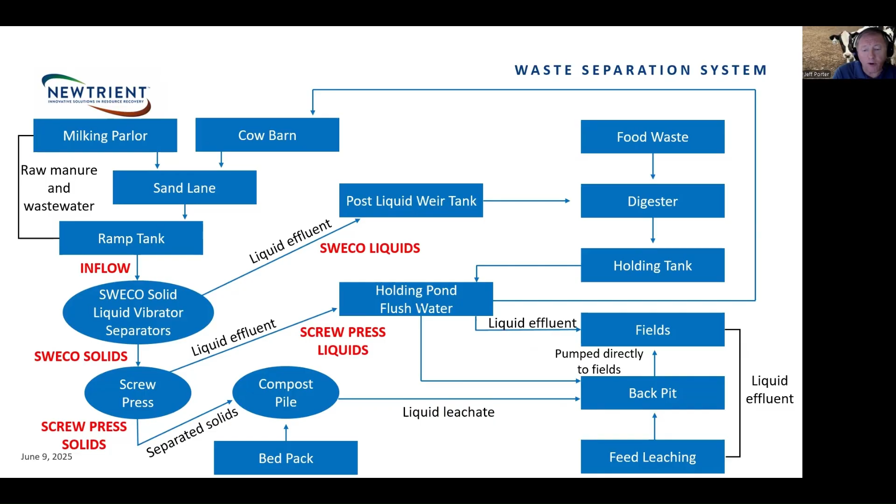Liquids from the screw press and digested effluent from the digester flow into the holding pond where it can be land applied and used for flushing the sand lanes. This operation looks to optimize their waste management system and utilize as much of the material as possible for on-farm use and for developed markets. Now, even though the Sweco vibratory screen is a small part of the overall manure management system, its role cannot be understated.

For the on-farm dairy industry, the Sweco vibratory screen is used primarily to separate solids from liquids. The three-dimensional vibratory action enhances this separation process. This vibratory action also helps to keep the screen clean, reducing downtime. It can be used for various applications, ranging from coarse solid separation to fine solid separation. And how it is used is dependent on the dairy's goals and objectives. Units can be operated individually or in series where they might be stacked or used in parallel. There are a number of different screen sizes, which adds to the flexibility of this technology. It is also used in separating dry products.

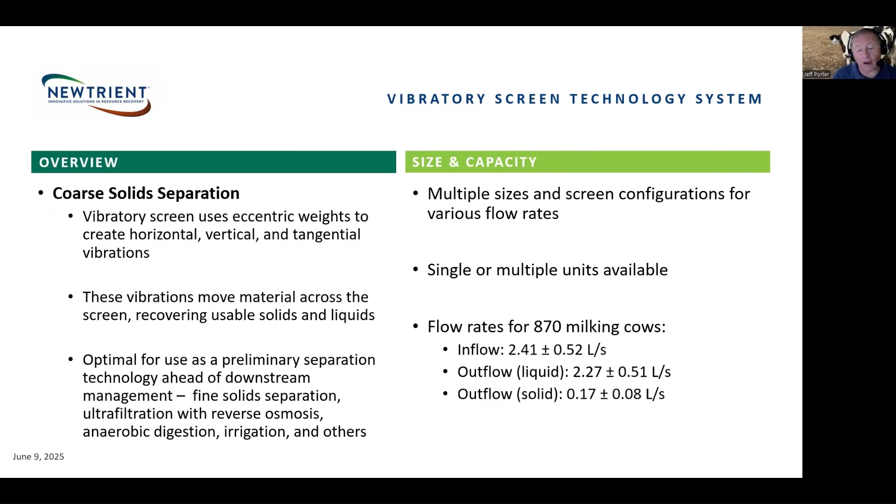Now, I have heard about vibratory screens for a number of years, but the only thing I ever saw was a schematic of one in publications. And that very same image was apparently used in all of the references that I had reviewed. But over the last few years, I have seen these vibratory screens installed on several dairies.

Here we see a cutout of a Sweco vibratory screen separator. And as the unit vibrates, the larger material moves to the oversized discharge, while the liquids and smaller solids flow through the screen and out of the undersized discharge. Separator efficiency and throughput can be adjusted with the ProGlide linear weight system. Also, up to 4 drums can be placed on a unit for providing additional separation fractions.

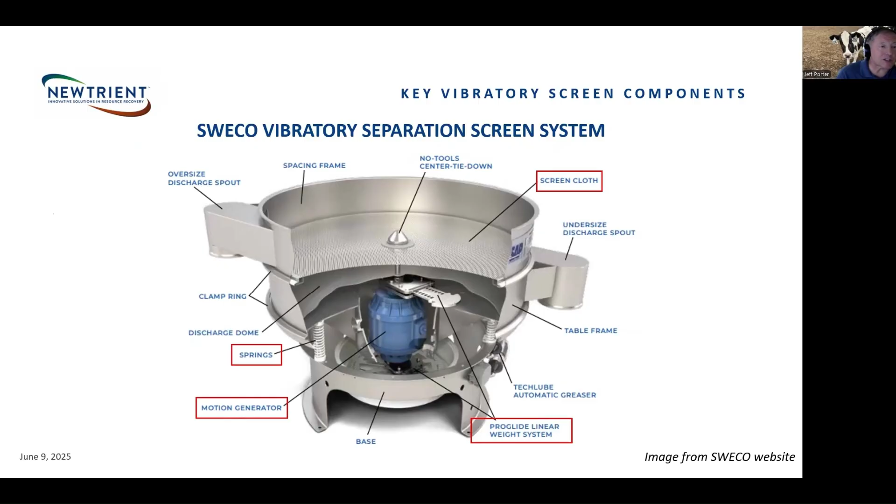Now, when looking for a waste separation system, as mentioned earlier, the technology or technologies selected are to meet the objectives of the dairy. Does one have the right feedstock for the system to operate properly? Will it flow through the system properly? Are the correct screen sizes used? What are the different products going to be used for, the larger coarse solids and the liquid effluent?

The Sweco units should be under roof and protected from weather. Manure slurry should not be frozen as it will not separate properly and will likely damage the screen and the separator. Proper and adequate storage should be provided for each of the products that are produced. Even though not as critical for the Sweco system, most sand should be removed from the waste stream in that it can potentially increase wear and tear on gears, screens, and shafts. With the tangential action of the screen, it is essential that all operation and maintenance requirements are followed to keep the unit running efficiently.

Now, as mentioned before, there are a number of applications for the Sweco separator. For the dairy where this evaluation was performed, the coarse solids were removed and the resulting effluent went to the anaerobic digester. Since these larger solids take longer for the microbes to break down, they were removed to help improve digester performance. It also allowed them the ability to create a compost product with the larger solids. Additionally, since the anaerobic digester had no direct agitation system, these larger solids would have a tendency to settle, reducing digester capacity and requiring periodic cleanouts.

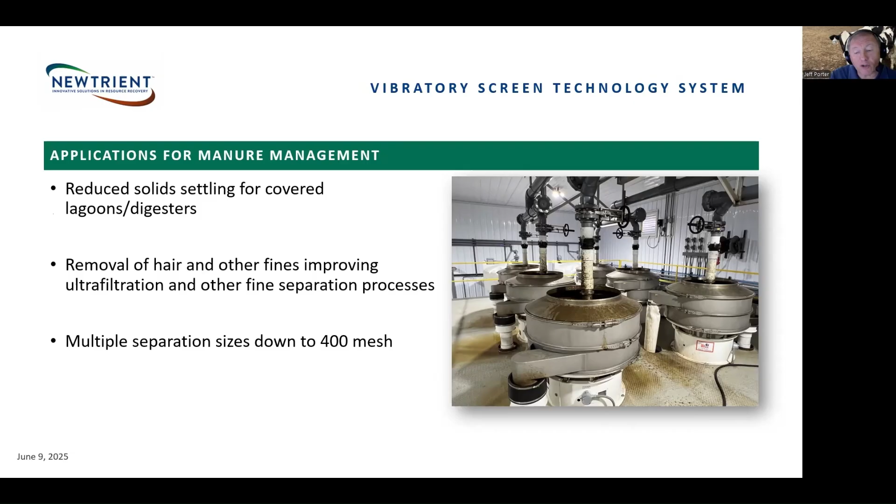For another dairy, the Sweco separator was used in this particular case to remove material like animal hairs and other fines that pass through the coarse solid separation system. This helped to improve the performance of ultrafiltration that was used on this farm and to reduce the amount of downtime required for backflushing the filters. The large number and various screen sizes also adds to the versatility of this technology. Now that you have a little background of this technology, let's take a look at some of the results from the evaluation of the Sweco vibratory screen.

For this evaluation, 5 manure samples were collected 3 times a week over a 16-week period. Even though this review focused on the Sweco separator, samples were also taken from the screw press. Flow rates were estimated using a bucket test. All of the samples were sent to the A&L Great Lakes Laboratory for testing. Results were reviewed and analyzed by the University of Delaware.

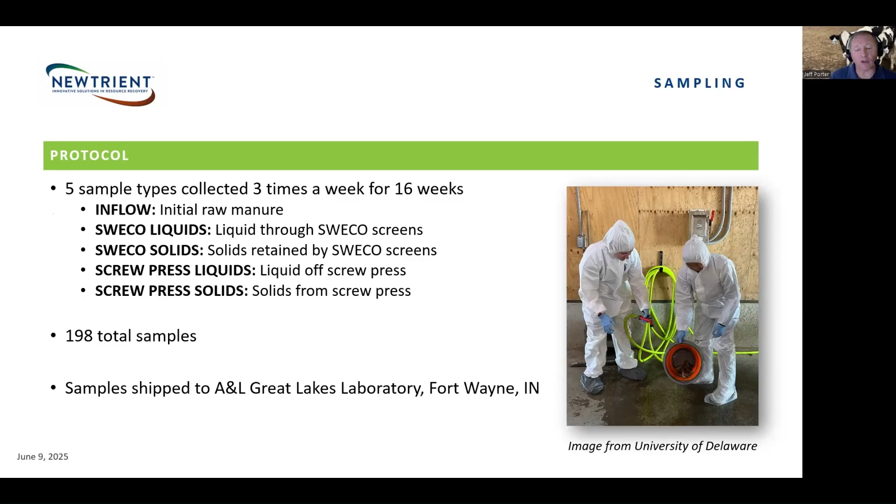As mentioned earlier, the Sweco screen was used to separate coarse solids from the waste stream. Liquid effluent from the Sweco flowed to the anaerobic digester for energy generation. The coarse solids portion went to a screw press. The solids portion was still relatively high in moisture content, around 90% or so, but had a lower moisture content than the original waste stream. The higher solids content helped the screw press operate more efficiently. The material shown in this image comes from the solids component of the screw press.

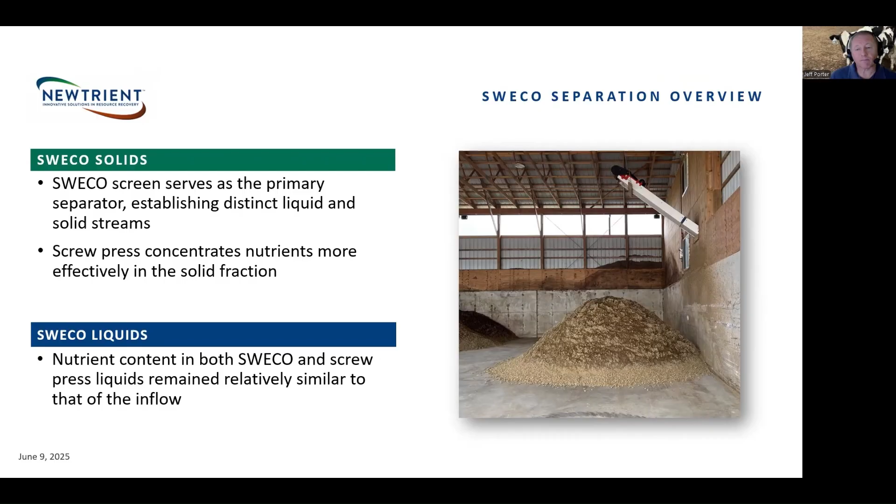Now, for the liquid effluent, both the Sweco and the screw press primary nutrient values were very similar to the inflow content. Now, this would be expected since less than 8% of the material was actually removed with the separation technologies. This supports the reason for using the Sweco unit to separate the coarse solids from the liquid effluent entering the anaerobic digester. This separation had little to no impact on biogas production, especially since they were also adding food waste to the system. And it also reduced operation and maintenance issues that could have resulted from accumulated solids.

For this operation, there are several benefits for utilizing the SWECO vibratory screen as part of their waste management system. Removal of coarse solids can help with nutrient management. Solid manures can be transported longer distances at a lower cost. This can help to address those areas that may be high in nutrients, such as phosphorus.

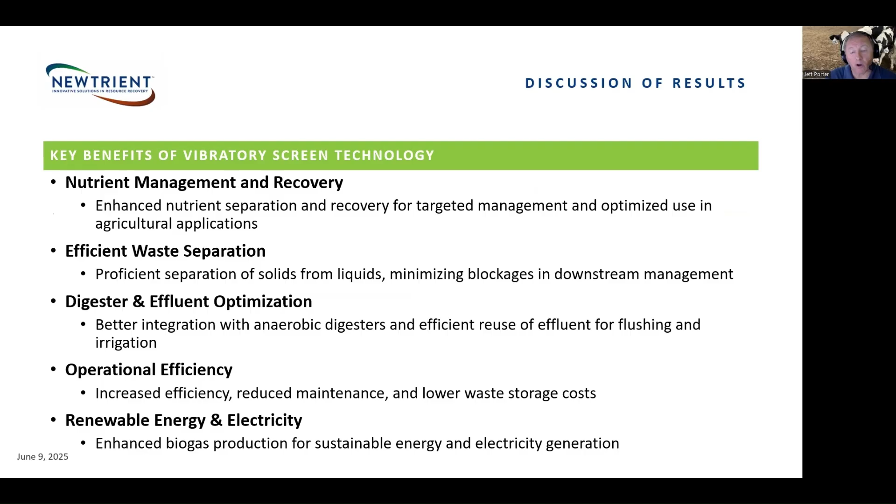Operation and maintenance costs can be reduced. With the coarse solids removed from the waste stream, less agitation and plugging will occur with land application of the manure. As with all mechanical systems, regular operation and maintenance should be performed for the SWECO unit. Follow the guidance provided in the Operation and Maintenance Handbook.

For this dairy, there are many unit processes working in conjunction for the system, and each process should be inspected to ensure that they are operating properly and that flow rates are maintained. Planning is an essential element for a successful waste management system. Understanding the various components and functions is important for the system to operate properly. Evaluating the rate of return on the investments of the technologies chosen and their expected performance should be a part of the planning process.

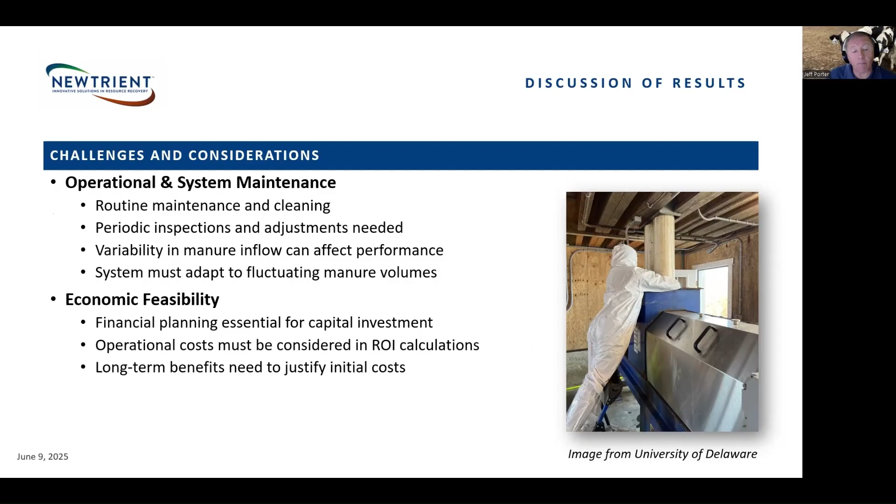On this dairy, there are multiple environmental benefits for using the SWECO vibratory screen in conjunction with the other technologies associated with the manure management system. From a water quality standpoint, removal of solids allows for more efficient application of the manures. Center pivot and drag hose systems can be used more effectively with less plugging. Solids can be transported longer distances at lower cost and be applied to fields that may not normally receive manures.

Using recycled flush water reduces the amount of fresh water that is utilized on the dairy. Removing solids from the waste stream helps to lower methane emissions. Removing the coarse solids helps with the anaerobic digester in allowing it to function more effectively and further lowering the methane levels through energy generation. Soil health is also improved by adding organics to the soil from manure applications.

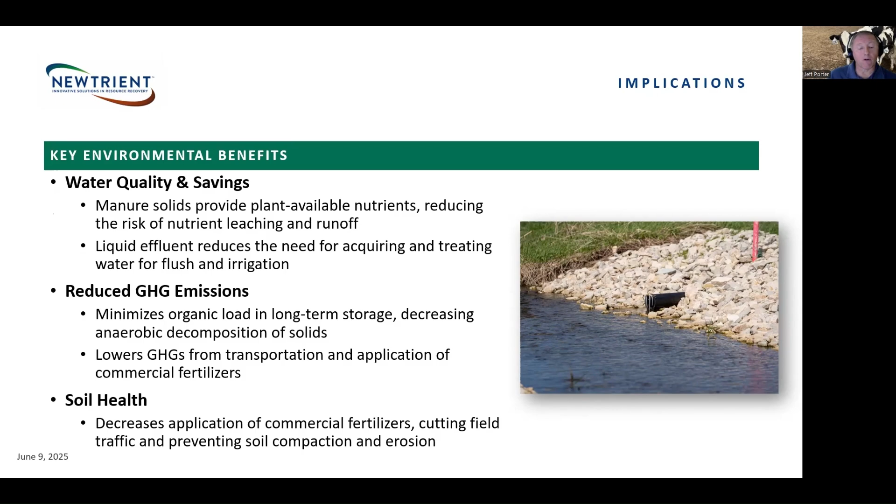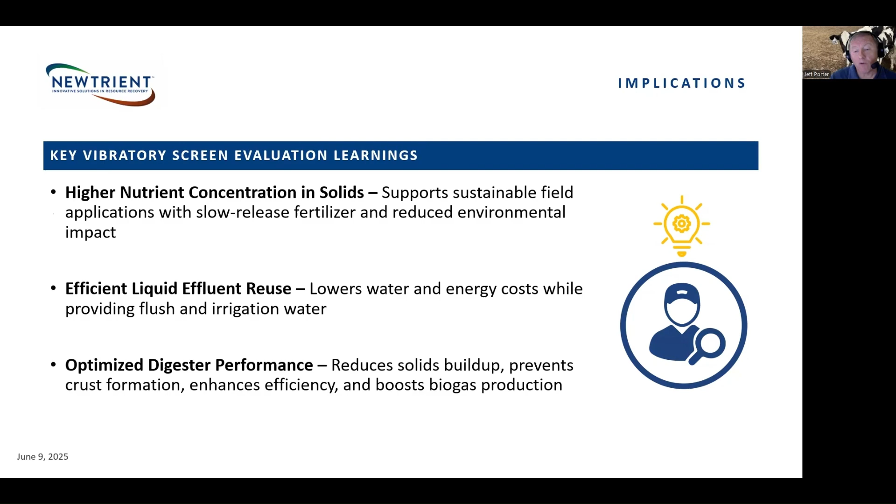Some of the key takeaways from this review include: solids can be used for making compost. Nutrients in the solids can be transported longer distances at lower costs. Removal of solids from the liquid stream helps with flush water, improves application of manures, and reduces plugging of irrigation systems. Anaerobic digester performance is enhanced, and with the removal of coarse solids, solids accumulation is drastically reduced.

So now let's look at some of the costs associated with the SWECO vibratory screen system. For the unit that was evaluated for this review, the HX48 round separator, the cost is around $18,000 at the time that it was purchased. Piping and other appurtenances would also need to be considered in the cost of installing a unit.

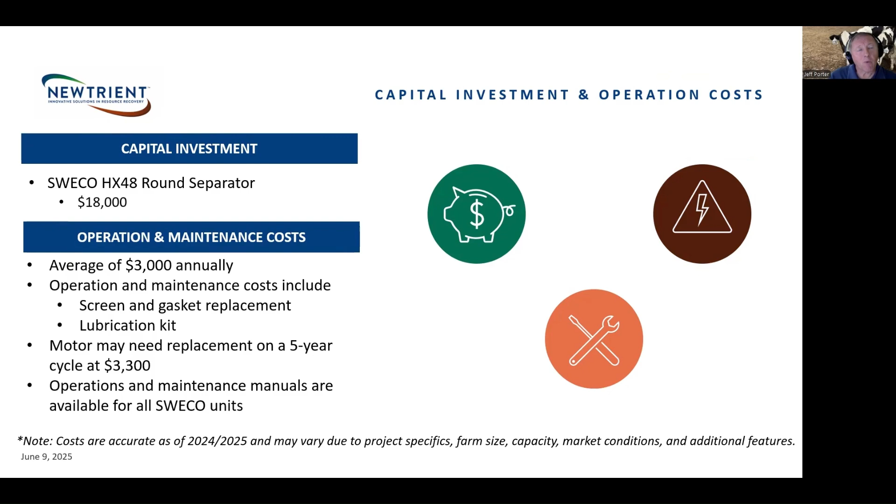According to SWECO, the average annual operation and maintenance cost is around $3,000, which includes screen and gasket replacements and the lubrication kit, which eliminates the need for individuals to oil and grease the unit. It is also estimated that the motor will need to be replaced every 5 years or so. Following the operation and maintenance manual will help keep the unit running more efficiently and more effectively.

By utilizing various separation technologies such as the SWECO vibratory screen, there is the potential to generate additional revenue. For this dairy, the separated solids are composted, where some are used on farm and others are sold. Even though not a revenue stream, the reduced coarse solids in the waste stream reduce operation and maintenance costs for the digester and the holding pond.

The liquid can be land applied more efficiently with less plugging of irrigation nozzles. The more solids removed from the liquid can also improve flush system performance. In relationship to the anaerobic digester, the renewable energy can be used on farm and sold to the energy grid. There's also the potential for carbon credits to be earned with the reduction in methane emissions.

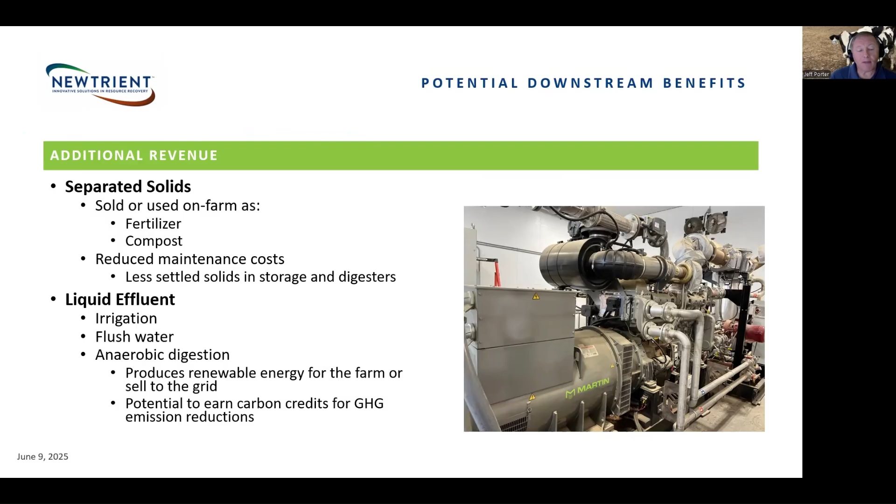When looking at waste separation or other technologies for manure management, there are a series of questions that should be answered before moving forward. Now, this is not going to be an exhaustive list, but they will provide a good starting point. Climatic conditions can impact the manure consistency. Should the technology be under a roof to protect it from weather concerns? Is sand bedding used? If it is, how is it being addressed? Sand removal may be necessary for technology to operate properly and to improve its longevity.

Should solid separation technologies be implemented? What would be the benefits of adding solid liquid separation? How will the solids be used? What impact will solid separation have on the uses of the remaining liquid effluent? Will it improve land application efforts, improve flush water quality, or provide other benefits? Can the use of manures help to reduce the amount of commercial fertilizers that are used? What impact will it have on soil health? If solid liquid separation is utilized, is adequate storage available for all components?